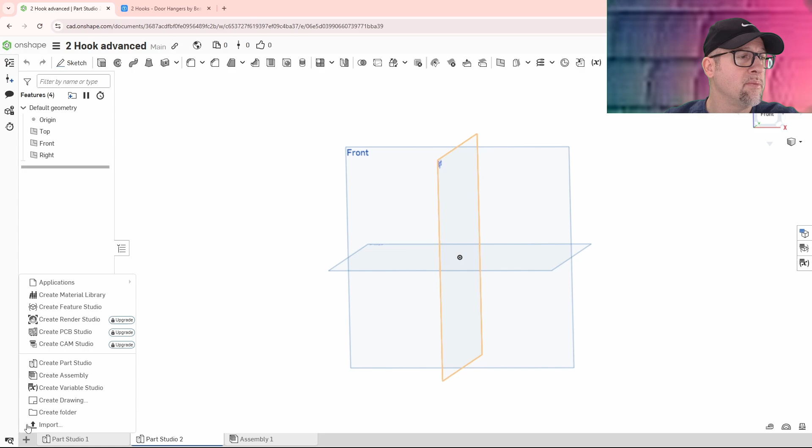I opened up a brand new insert tab, create part studio. Okay, I believe you should know how to do that already. So now we will put in a new name and we'll call this clamp.

I will hide a couple of these. So I will hide this one, I don't need my top and I don't need the right. Just kind of click on that little eyeball. And then over here I can click and go to the front.

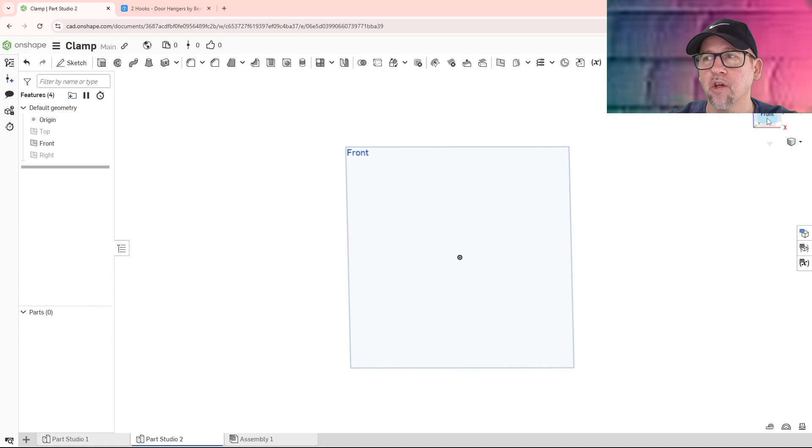So first thing I want to do is just basically build a C. I'm going to do a sketch on the front plane, and I'm going to build, what I can do is just start with lines.

60 millimeters long. Let's see, what's 60 millimeters long feel like? Yeah, that's right, there's 58 millimeters long. Okay, 60 millimeters long right there.

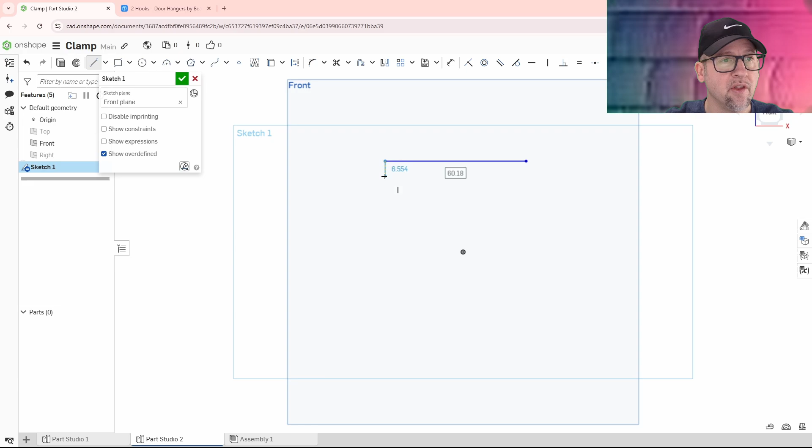Yeah, I think that's sufficient because we're going to put something on the very top of this. So get it approximately that, and we're going to take it down and make it probably 60 millimeters length to there. Okay, and then we can tuck this in a little bit.

So let's say 50, and then we're going to have a general thickness of 10 millimeters, and then we can plug all that stuff in.

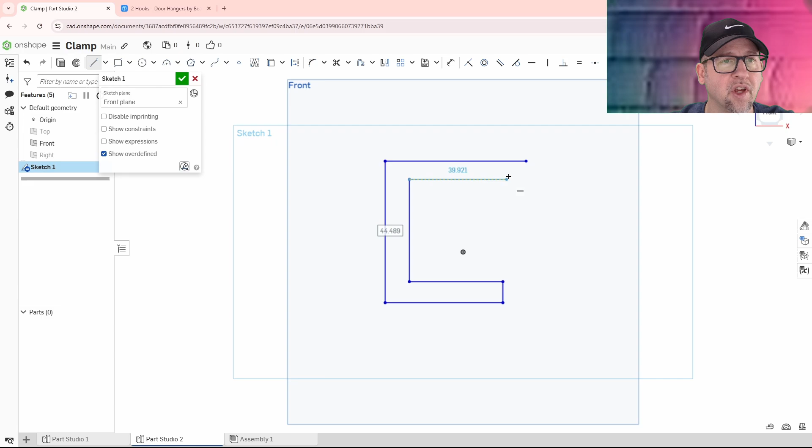So if I wanted to stick to that other point right above it, what I do is I grab it and then I just pull it down. So that connected that guy to there. All right, so we built our basic piece.

Now we're going to our dimensioning, and now we will dimension this, and we'll make it everything 10 millimeters. So it's going to grow a little bit, and then we're going to have to decide what size total size to make this. So remove that one.

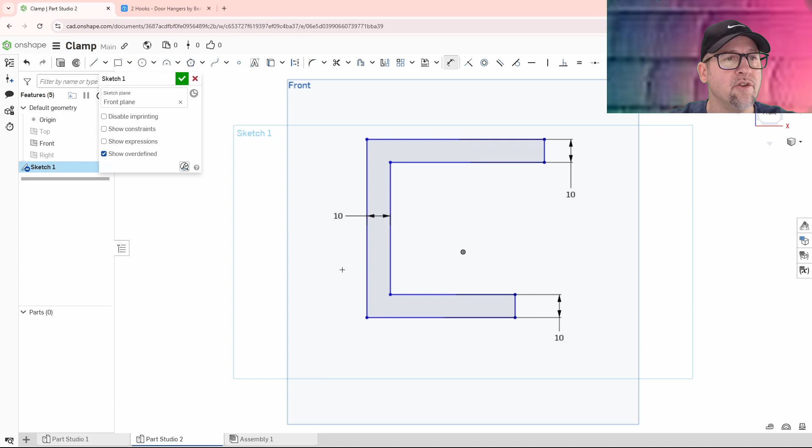Control Z to remove that. Click, click, 10, enter. All right, and then we want from this edge to this edge, let's say 50, and this one to this one 60.

Okay, so now that basically is done. Now we can start to build. We could start extruding off of this, or yeah, I think that's probably good.

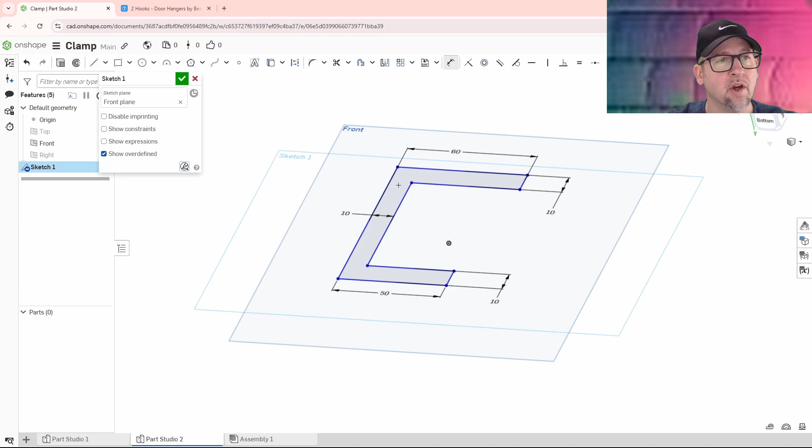We may want to put a nice general radius inside of here, so let's do a fillet. I'm going to click on my front view, get back in there, put a fillet here. This is going to have some pushing forces, so as you are screwing in this, it's going to start pushing, and it could theoretically break in this area.

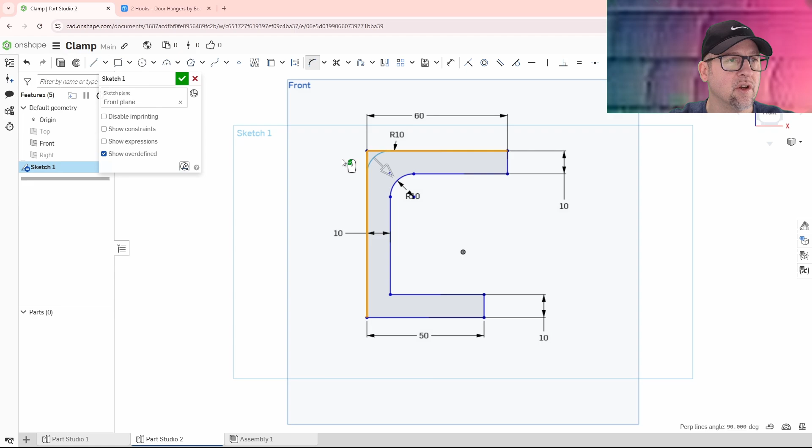So we'll put a nice 10, let's see, 10 millimeters. There we go. And we can clean this one up. So 10 plus 10, we're going to do a 20 on this edge right here. And then 20 should look, yep, okay.

Okay, now 10 here. 10, and then 20 here. Okay, so that should work for us.

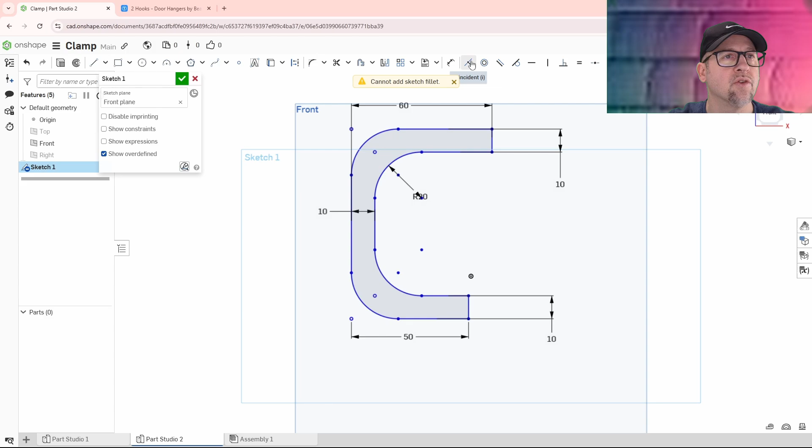So now that I just put this large, I need to change that one right there. So let's change that to 10. It doesn't like that. Okay, so red means over constrained, so I will remove that.

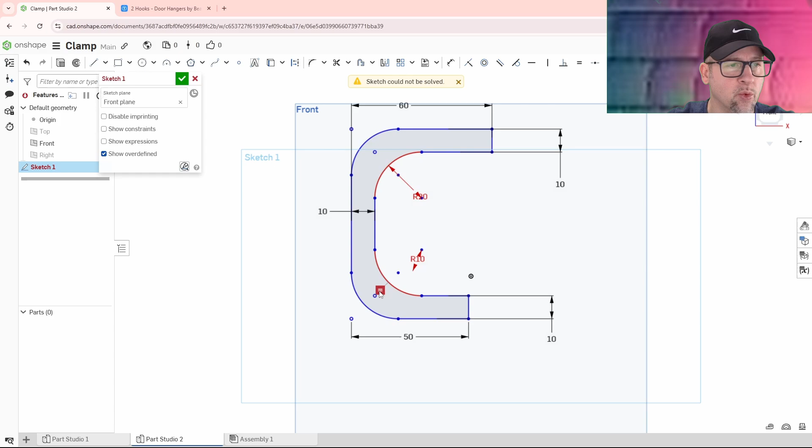Let's change this 20. It likes 20. Okay, as soon as I click 10, it doesn't, it must have some sort of equals constraint here. I'm going to get rid of that equals. There we go, that was it.

I'm going to change this to 10. There we go, all right. This one should be 20, I think. Let's go 20 here, let's see what 20 looks like.

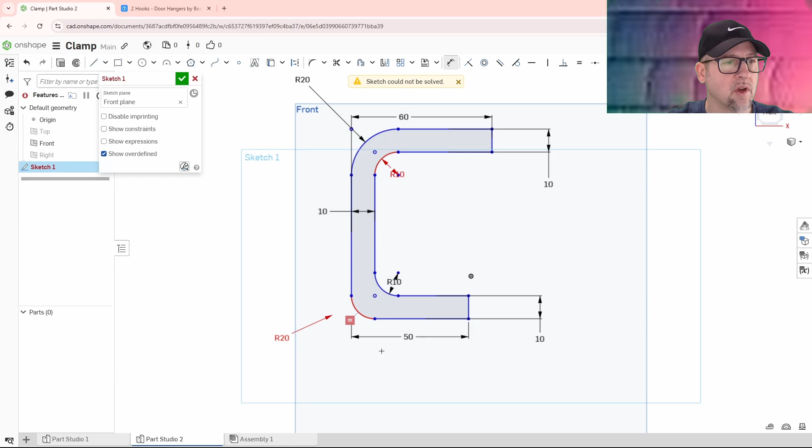It doesn't like that because it's saying it's equal to it. No, not equal, okay, there we go. Now it looks better. Now we'll make this one 20. Okay, and then get rid of that equals. All right, now we're good to go.

So 50. We may have to play around with this. So if this is 50 millimeters and we put, let's say, an M8 bolt in here, M5 bolt, it might, M8 should be okay, should be fine. All right, so I'm going to finish this one right here.

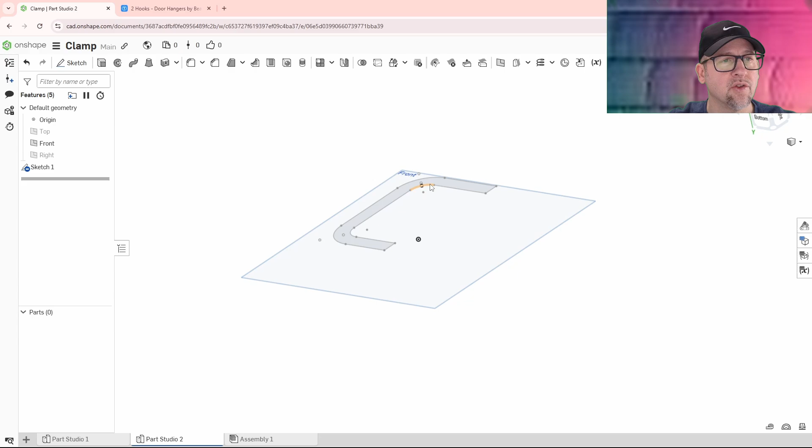What I want to do now is scroll up. I want to take this surface and extrude it. So I'm going to do this extrusion right here, and we're going to make this, let's say, how thick do we want this clamp? Let's see, 25 millimeters.

Maybe 30 millimeters sounds good to me. Okay, we got 30 millimeters. I think 30 is good. So here we go, 30 millimeters, okay, say okay. So that's for our first extrusion.

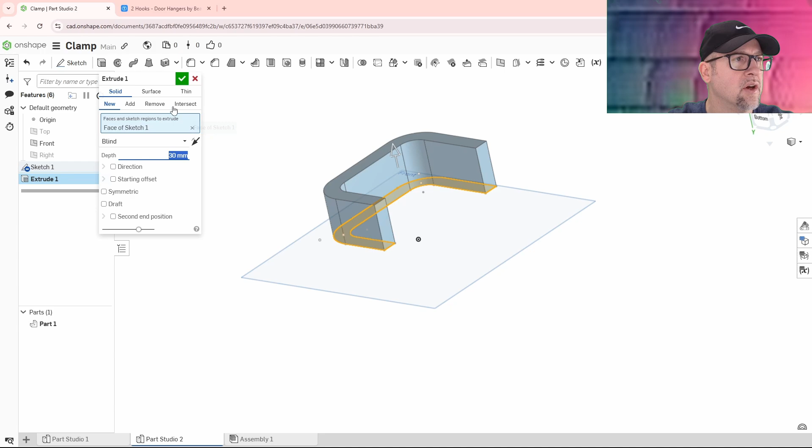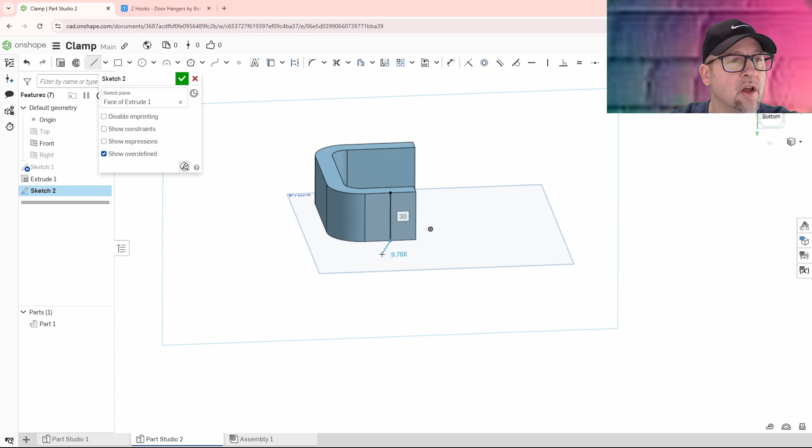Now I want to poke a hole right in here, centered. So I'll draw a little crosshairs. I'm going to sketch on the surface right here and choose a line. There, you see the little symbol - that's midpoint to midpoint. Then I right click, escape that line, hit L for line again, go midpoint, right click, escape. So those are two lines.

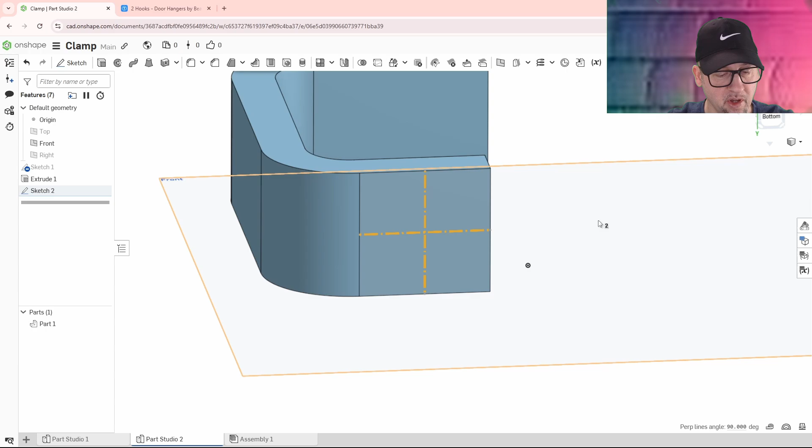Since I don't want to extrude these two lines, I can make them construction lines. Hit this button right here for construction, and that changes them. Right click, confirm sketch - it jumped me out of the sketch, and to turn these back off of orange, I want to hit the space bar.

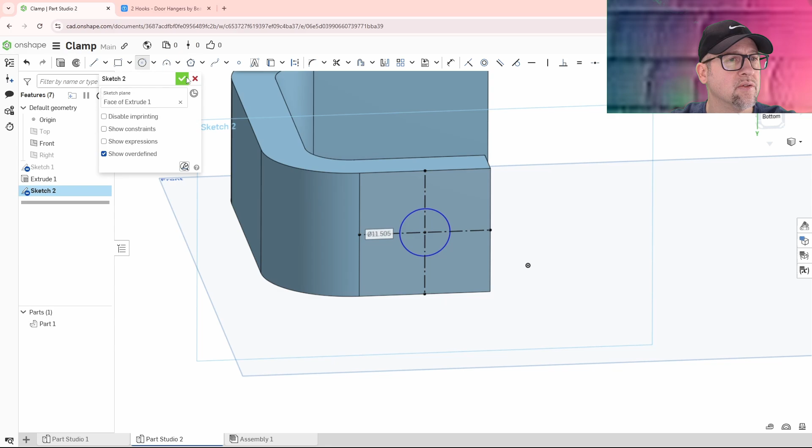Actually, we can go much larger. Let's go with 8, and let's go with 7, because we're going to poke a hole, and that hole will allow for an M8 bolt.

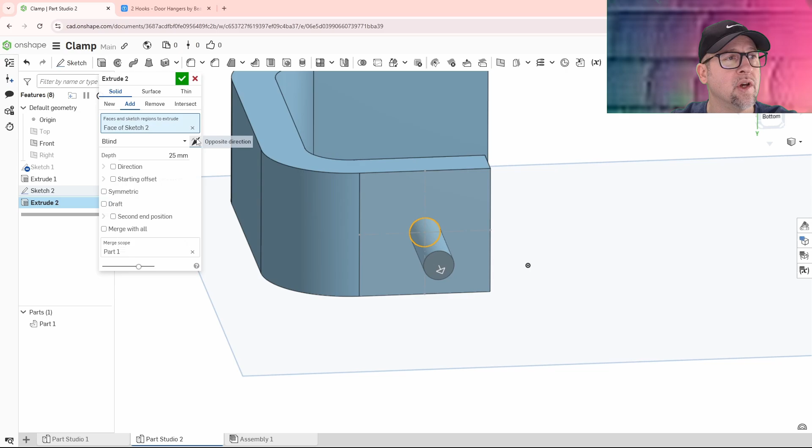Okay, so now we're going to extrude that surface. This guy right here, we're going to extrude him through the other way, so hit this button for opposite. Okay, and hit OK - and we see that nothing happened.

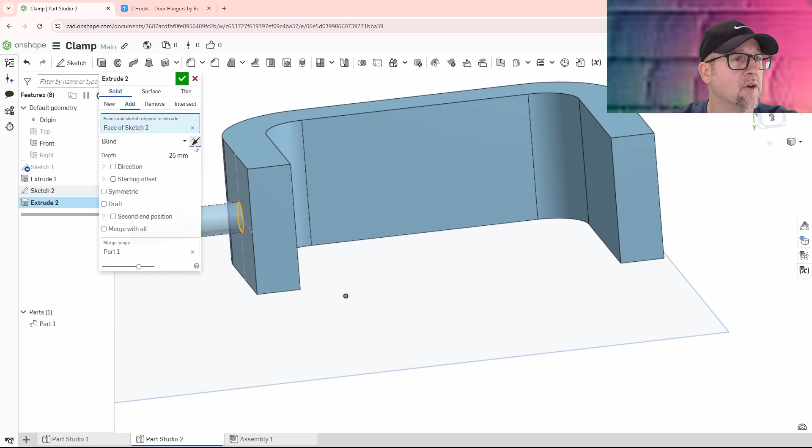Why did it not remove? Oh, that's it - so it's doing a boss basically. Now we want to remove. Okay, so there we go, now we got our hole. So we just gotta click that remove.

Say okay. Alright, so now we got our size, and we should be able to put an M8 bolt inside of there. Alright, so we're going to work on the threads of this guy now - so let's do an extrude.

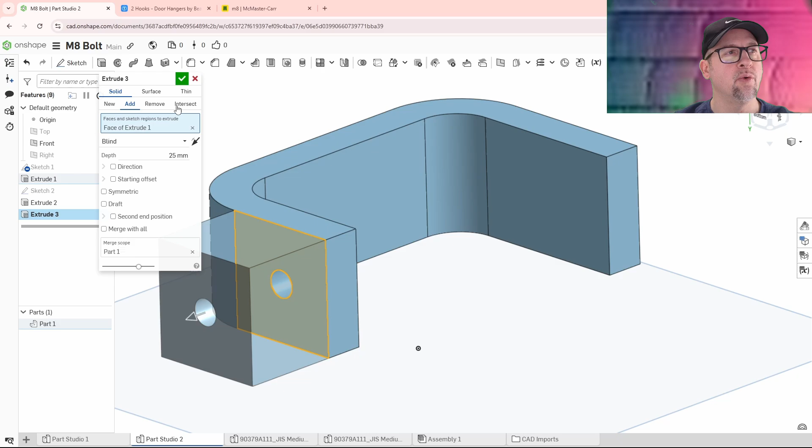Now, as you can see, if I select here, it's just going to select this whole face - I don't want that. So what I want to do is hold down Shift, and I should be able to unselect that. Then I can go into my sketch and pull only the sketch piece from there, and then pull out my bolt hole size that we want. So we're going to go with 50 millimeters here.

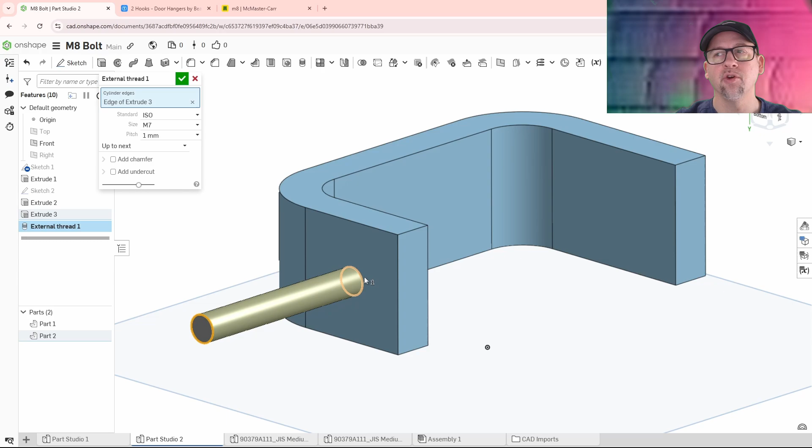Okay, so hit OK, and the way you would create this bolt thread is you would add a helix here. There is a feature called external threads, and the reason we don't use external threads - if I choose this M8, I choose that right there, this cylinder edge - it's not going to let me, it's going to choose M7 because my hole size here is M7.

And when we add that, it's actually not going to put it in there, so it's not good for any 3D printing purposes. So to make this easier, I will delete this external thread, and I will delete this extrude, okay?

Alright, so now we're going to go to the McMaster-Carr website, and I'll just show you how I got here. So McMaster.com - they will provide a lot of 3D CAD for you automatically, so all you gotta do is put in what you want.

So I want an M8 bolt, okay, and it's going to tell me what kind of M8 bolt do you want. So I'm going to slide down - I want metric, I want a hex head screw, and this type right here. So strength doesn't really matter.

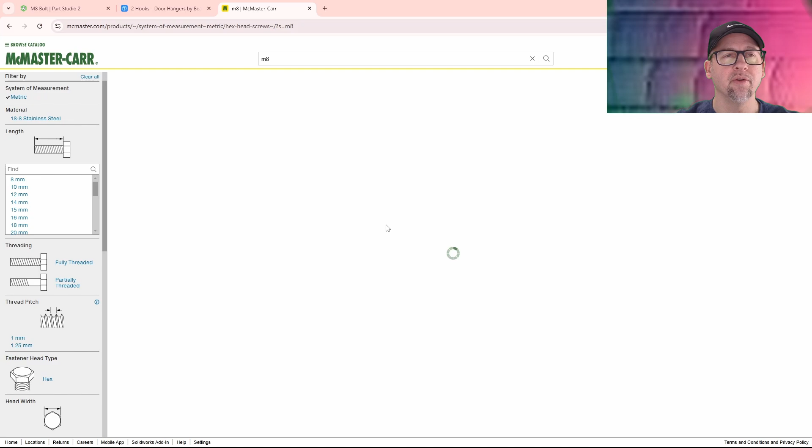This is, we just need, you know, cheap and available. Maybe you can pick this up at your local hardware store or something - yeah, Lowe's, Home Depot would have stuff like this too. So here we go, we got an M8 fully threaded coarse, and we want - what's our total length of it?

Let's see, we're going to go about 60 millimeters - so 60 millimeters fully threaded coarse, and then we can download that, and then 3D IGES.

Let's try a step file, see if it allows that. Download. Okay, looks like that worked.

Okay, so that downloaded. So now I'm going to go back to my part studio and I'm going to do an import - I'm going to try to import that file right there. So not that one. Erase that.

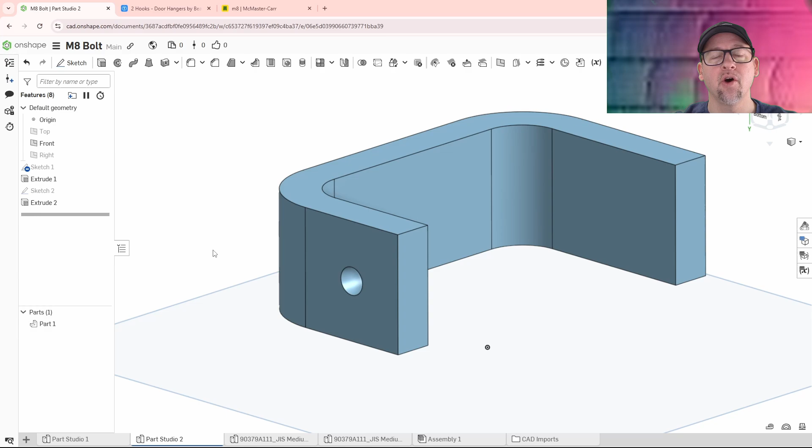So now I'm going to go to the import, then file, import. There's my new step file. I will open that, import appearances, import in this document. Okay, now it's downloading and we should see a new thing pop up down here. I'll close this, or it should close automatically.

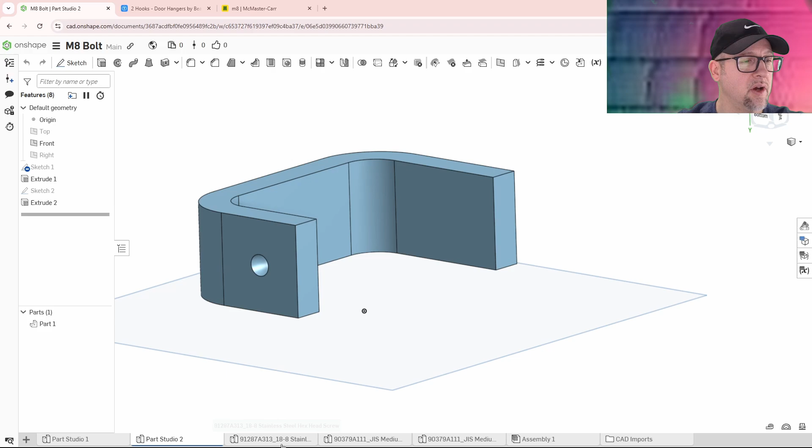Alright, so we got our M8 bolt right here. Now we need to import this bolt into our assembly or part. Let's go to derived part right up here. We're going to throw this in here and it's asking which part studio we want.

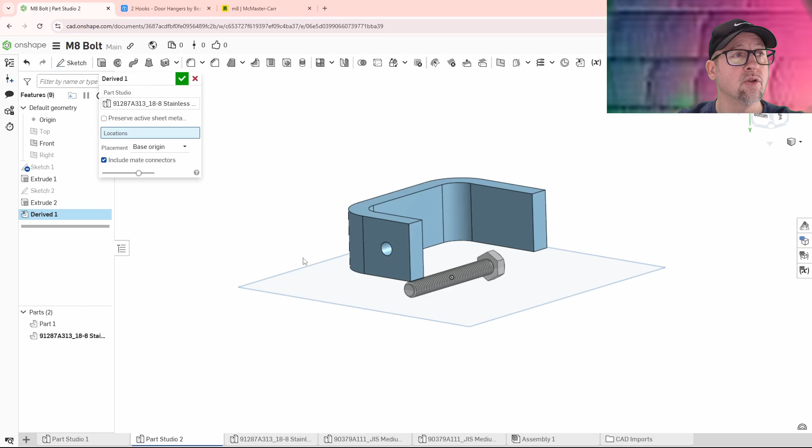We want this one right here. It's automatically importing it. Close that, and now we can say okay. Now it actually threw that inside of there.

So now I want to place this on here. Of course, I want to flip it around, so I'm going to do a transform. The transform function is right here. Click on our bolt, we're going to rotate it about a line. So let's rotate it about this axis here at 90 degrees.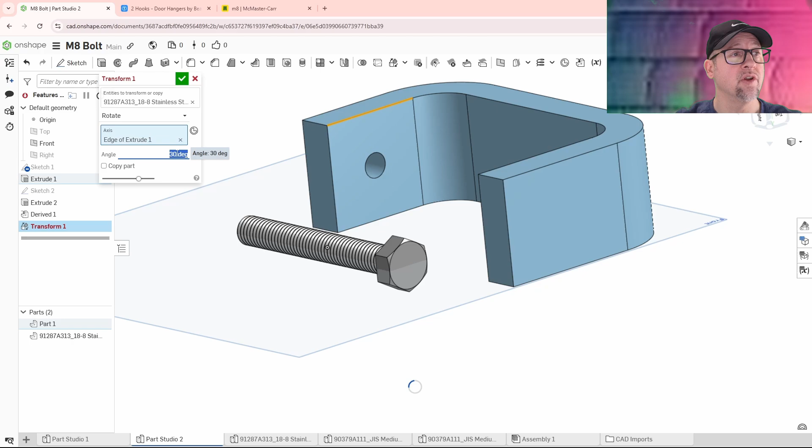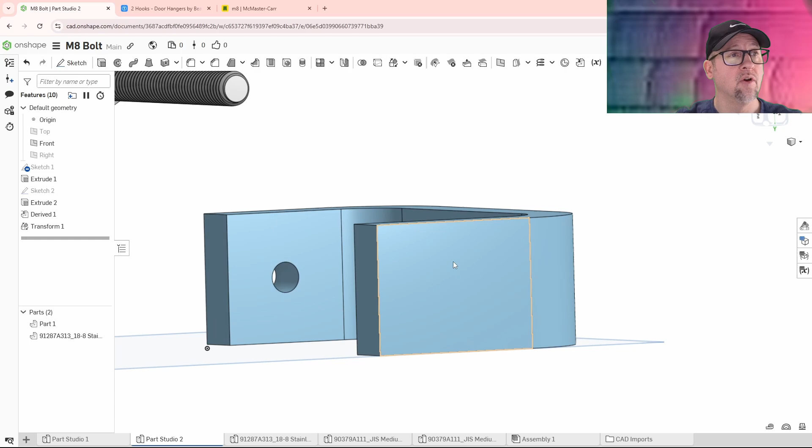180 degrees, sorry. Okay, perfect, say okay. Now we want to actually put this bolt in there, so I want to find a center point of this bolt right here. Using the middle mouse button to pan it back into position, hold down that middle mouse button.

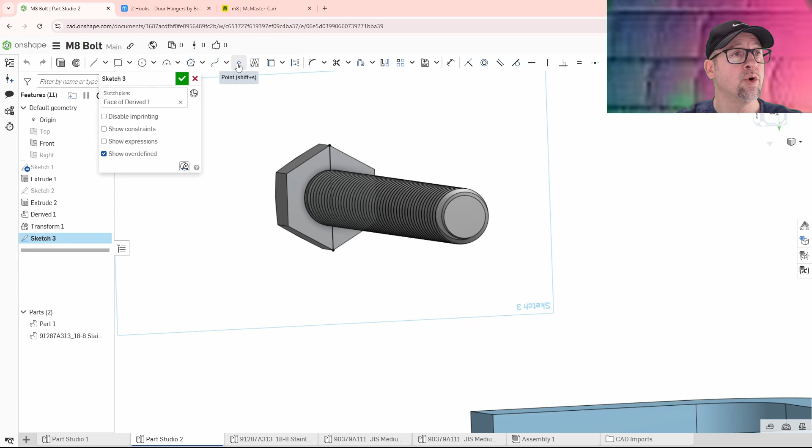So I'm going to create a sketch on this surface right here, and create a line from this face to this face. Right click, escape that line. Say okay, and now I want to go back in this sketch and put a point on the midpoint of that line. Alright, so we did that.

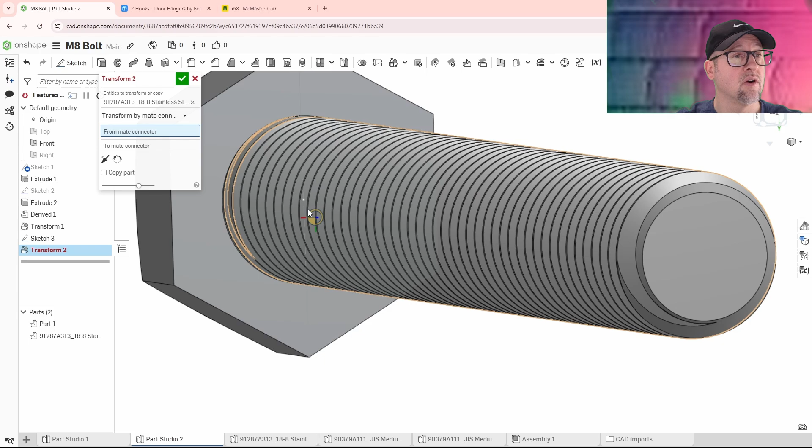So now we want to transform this back into the other one. Transform our part, then transform by mate connectors. So from here, to pan it over there, it should pop into position. Okay, it did the opposite of what I wanted, so maybe I can do a rotate secondary axis, let's see what it does.

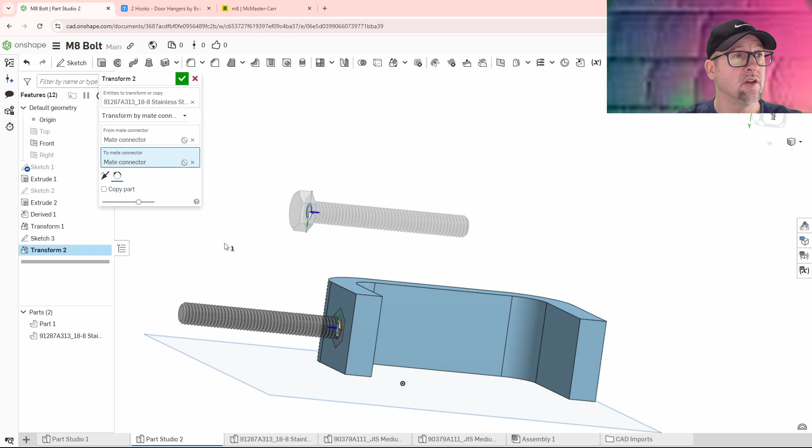Maybe should fix it for me. Oh okay, it's rotating something. Okay, we can work with that, that's no problem, just another translation. Alright, so transform again, transform this guy.

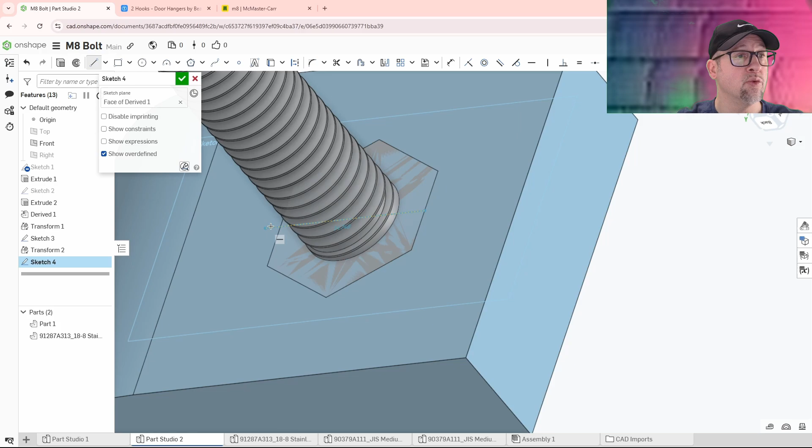We're going to have to transform about a line inside of here. So transform rotation axis is... where'd my line go? My line disappeared, so let me create a new sketch here. I want to create a line between this, which is what I'll rotate about. Okay, there's my line. Now I want to do the transform again, rotation about this line and 180 degrees. There we go, now we are actually done.

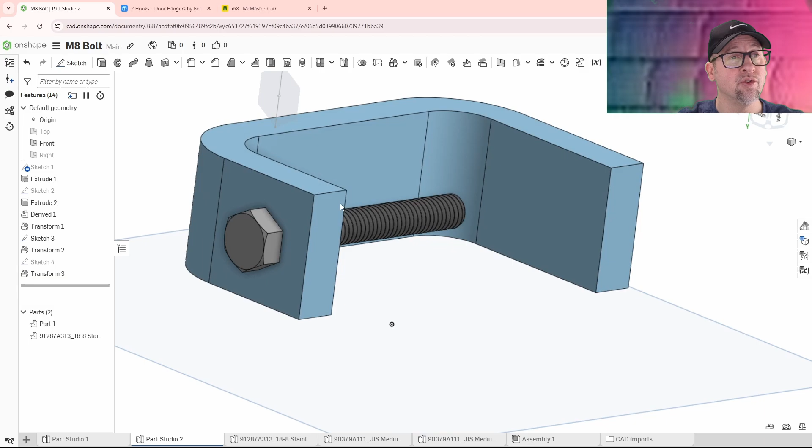Alright, so it is placed inside of there. This is 8 millimeter, this is a 7mm hole. Now we should be able to grab the Boolean feature and do a subtract. So when we use a subtraction, we click on that, we choose the tool.

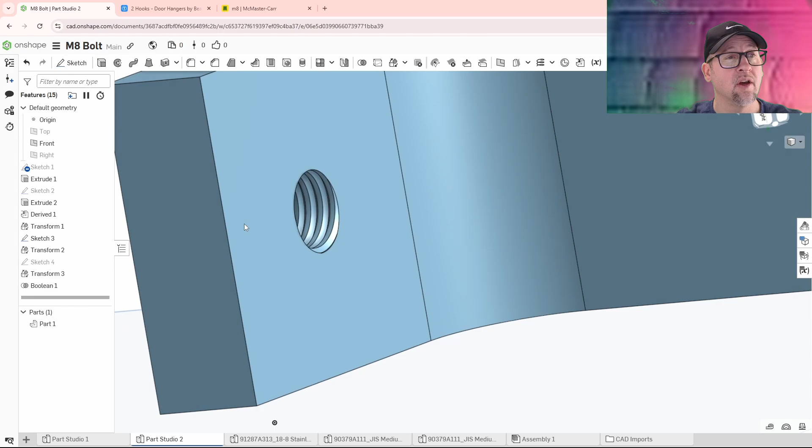Sometimes I get this confused, I'm sure everyone else will. So this is our tool, and this should be our target, and we are removing that from there. We'll make a copy afterwards, but let's show what it does. Okay, so now we got our threads inside of here, those are the threads we want, and there's a little goofy issue right here. This is like a chamfer lead-in, which might be okay.

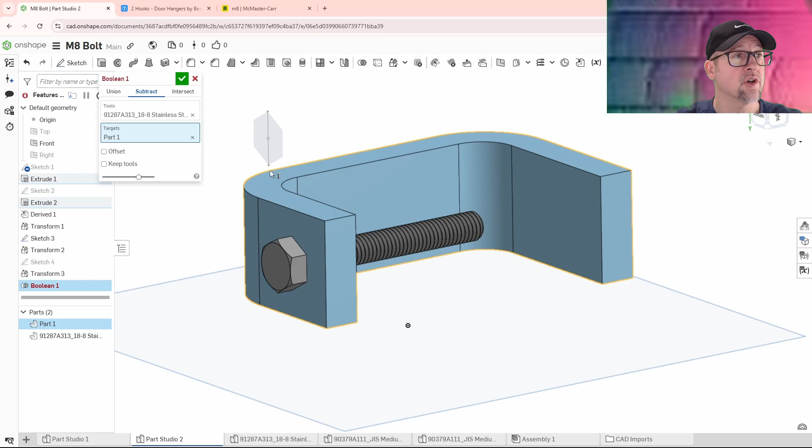That might be okay. So now, where'd our part go? We could re-derive a part, but let's undo and choose a different function of that subtraction. So we're going to go back to Boolean, then go to subtract, choose our tool. This is our tool, this is our target, and we want to keep the tool.

Okay, we want to keep that. So now if we hide this part, hide that part, our threads are still in there, and our part is still in there. So now that's good. So now we got a store-bought bolt, or we could possibly 3D print this.

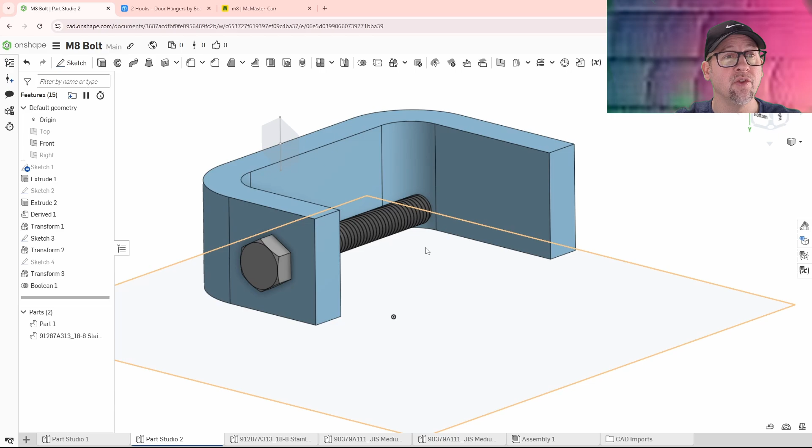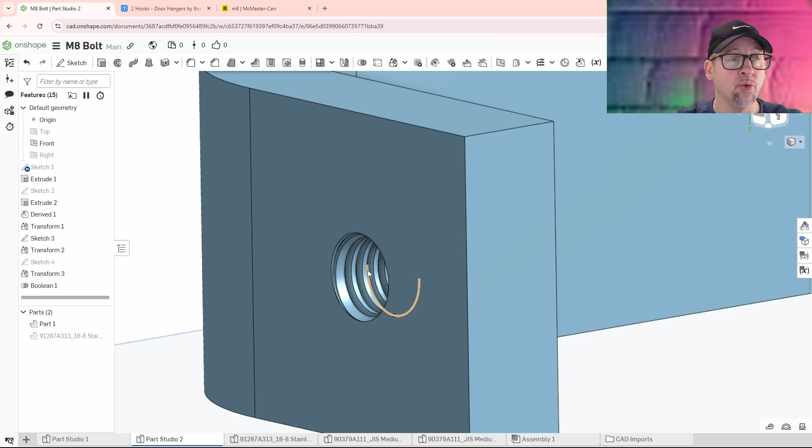We may have to play with some of the lines inside of here, make this a little bit smaller versus this one so it will thread in properly. But most likely I would say keep the bolt the same, just adjust this small amount of thread inside of here. So what we would do is go inside of here, maybe do an offset, or create your own helix and then a subtract, extrude a helix throughout there.

Alright, so now we will start to create the little top mechanism for the very top of this. We can possibly use a store-bought nut, or create our own piece of plastic that does that. So let's create a sketch on this face right here, and now we're going to just start with a line. And that line we want to have it at 8 millimeters.

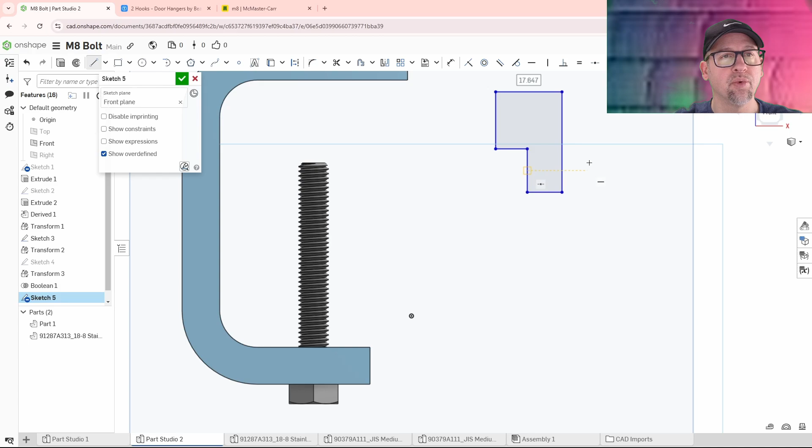We can stick it to that one, to the top of front view. We're going to mirror this shape, or we could do a revolve. Now I click there, and I want to revolve this. So I want to create a brand new one.

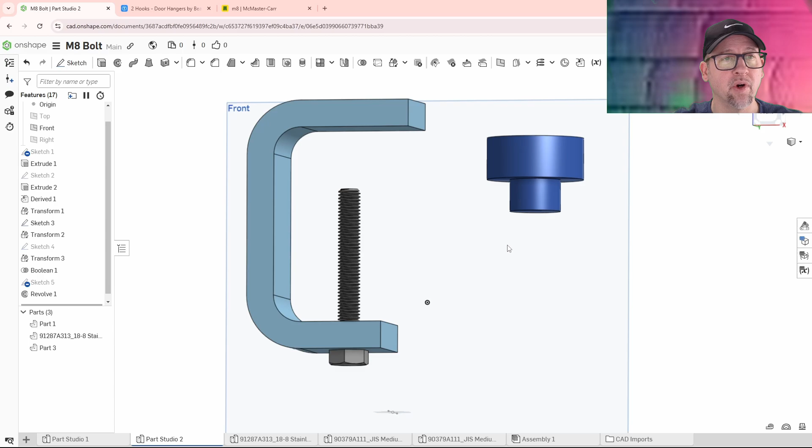My revolve axis is right here, and my faces and edges to revolve are here. So there we go. Now we can shrink this down if we want, or throw this directly into there. I'm going to put it right on top of one of those holes, and then we can subtract out some of the threads from it.

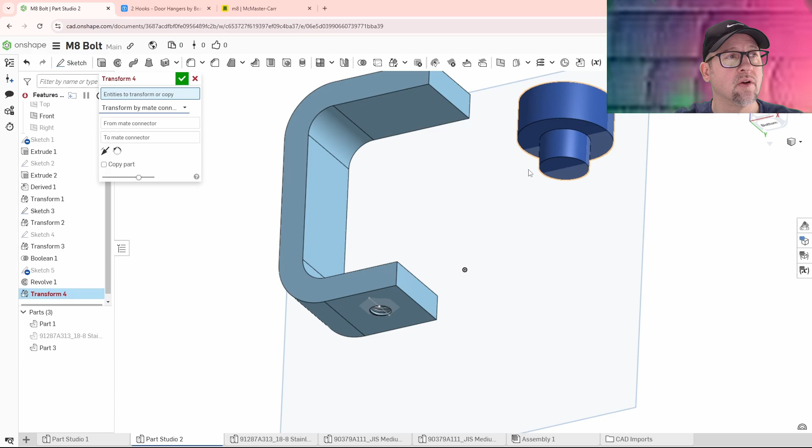So let me do a transform. We can do a mate. Should be able to take it from this surface right here, from mate connector to other right there.

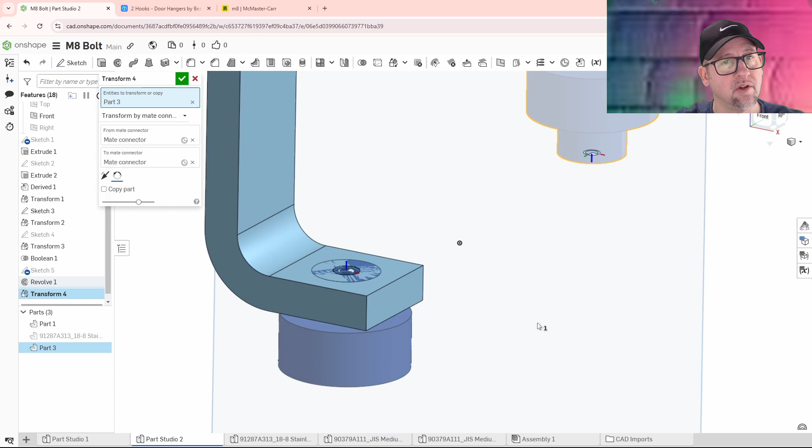Entities to transform this guy, and we want opposite. So let's see if it will let us do the opposite face. Nope. Okay, what can we do? That face to this face.

Oh, okay, I know why. It just took them directly and flipped it. I don't know why it flipped it. It's kind of odd. Flip primary. There we go. That's what we want. Just flip the primary axis.

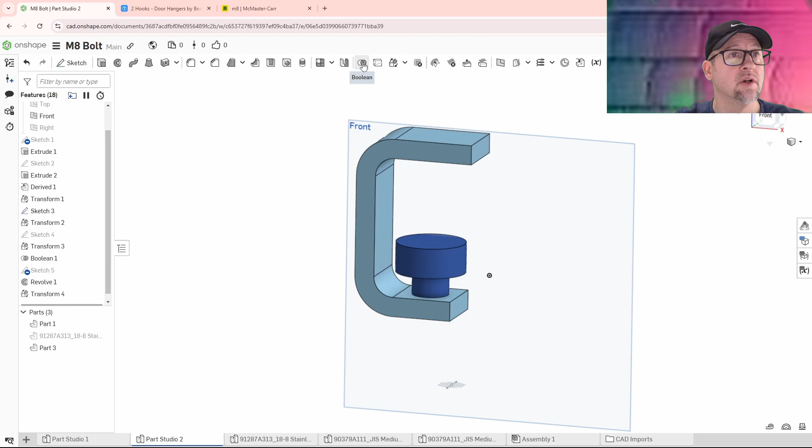So now we could actually do another transform after we get this one here. Now we'll push this guy up. Let's grab transform. Where's my transform? Right there. We're going to move this guy up.

Translate with XYZ, and then we're going to look over here on the right hand side. We see in your view being the Z, positive Z, so we're going to move that up. We just grab this too, so we can pull that all the way up there, and we can actually take it into the other piece.

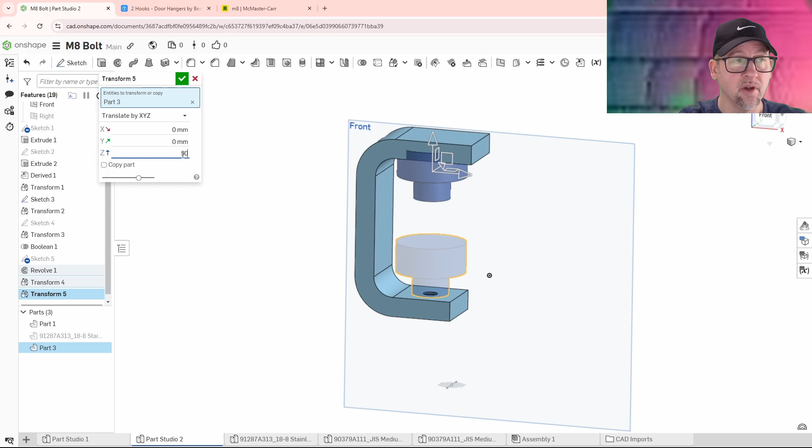That's okay, but I'm going to make a nice even number of 40. I'm going to hit OK. I'm going to bring my threads back in here. All right, and then should be able to see that, yeah, this should be going into it.

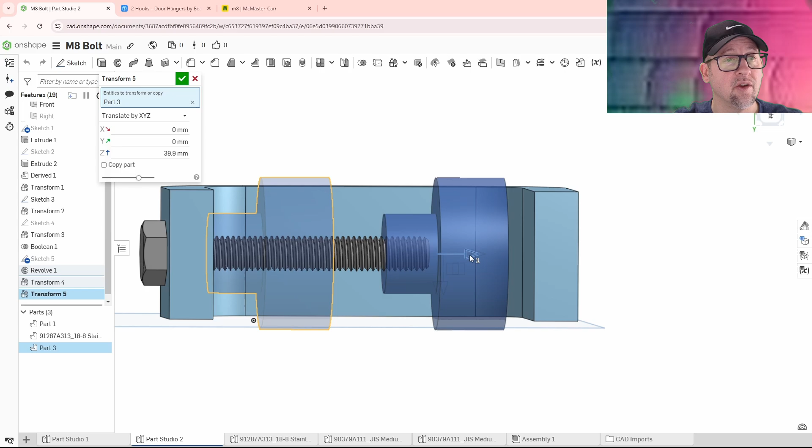It doesn't look like it's going in much, so I'm going to change that transform back. Actually, it's not that transform, it's this transform. I'm going to move it back a little bit so now we can see through it. All right, so we got lots of threads. That seems like plenty. She's okay.

And now we are going to do a subtraction inside these two guys. So now let's see if it hits. No, nothing hitting here, so that's good. If this is fully extended, it should not hit. And we can have a little gap because the table is always going to be a little thick.

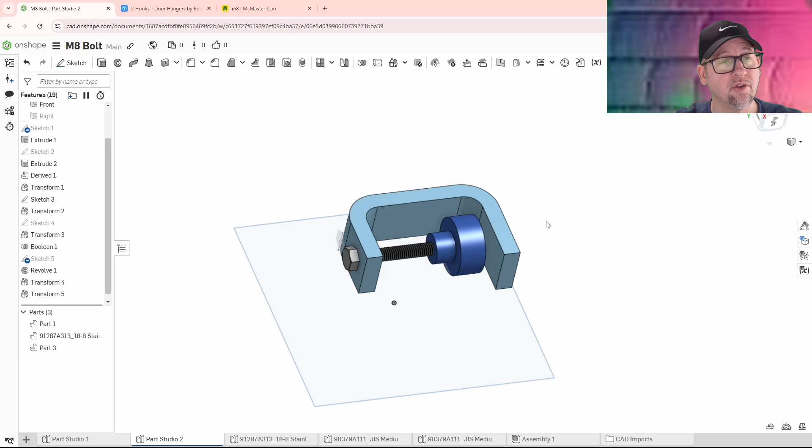There's going to be something between that, right? That's our thought. And now I will do a subtraction. So here I will go to subtract, select my tool. So this is my tool, this is my target, and then I want to keep the tool, say okay.

So now if I hide my part, all right, I just did the opposite. So as you can see, I just chopped the bolt. So let's undo that. And then we're going to go back to Boolean and then just swap these two. So we want the tool to be the actual stainless steel. Let's undo that.

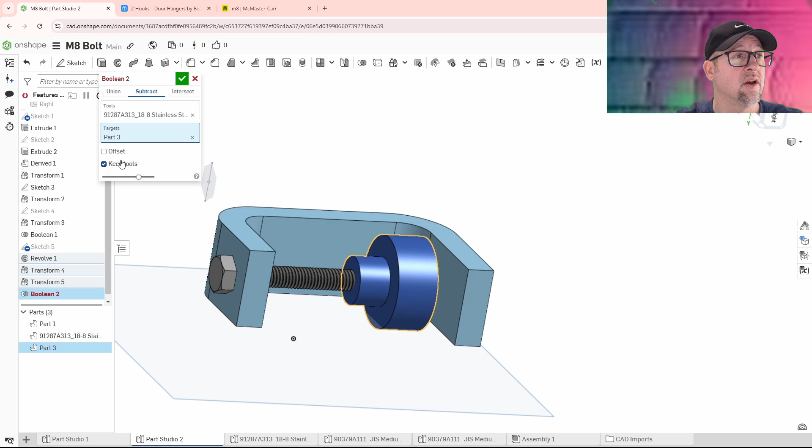So tool is this guy. And then target is this, oh, not that guy. Target is this guy. Keep the tool. And now we should be good to go. There we go. We got threads inside of there. And once again, if you need to make these threads just a little bit bigger, you can do an offset.

But let's get our part. So now we got our C clamp pretty much. Everything is made. This is all one kind of - it is an assembly in true aspects, but is actually in one part file. So it's in this M8 bolt file right here.

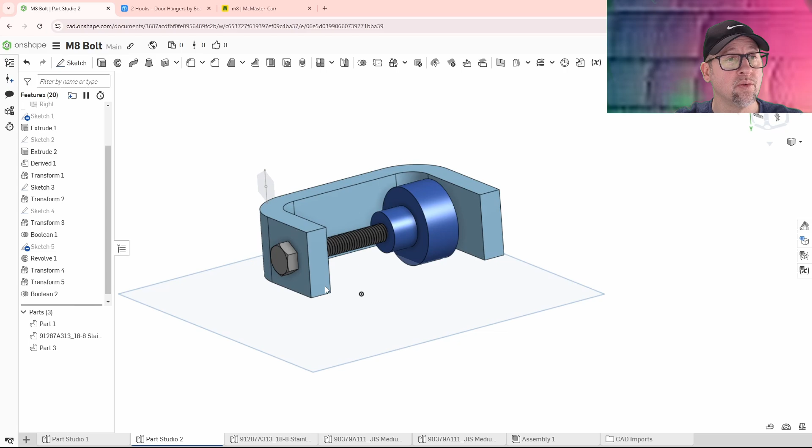We're going to be using a store-bought bolt, or you could do the 3D printing of that. You could export this out as an STL and make all these through your 3D printer if you wanted, or an outside company to make this for you, however you wanted to do that.

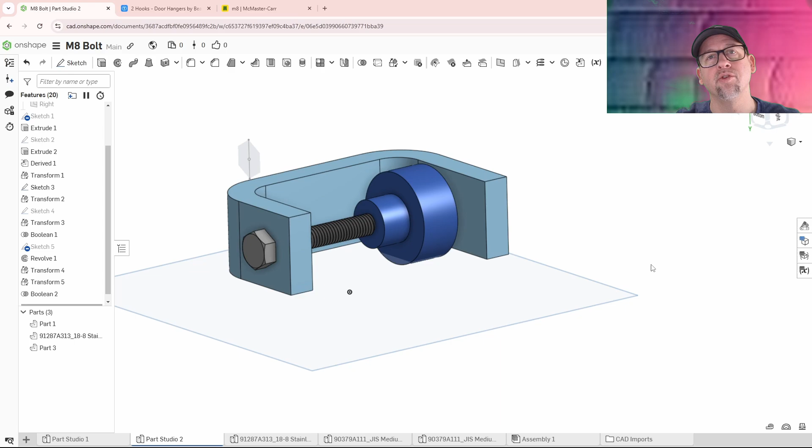So hopefully you guys learned something from this tutorial here and understand a little better that you can use outside resources to pull in information. McMaster-Carr is a very good website to use for pulling in data, standard size or metric components. So I highly recommend using that website, or Misumi is another one.